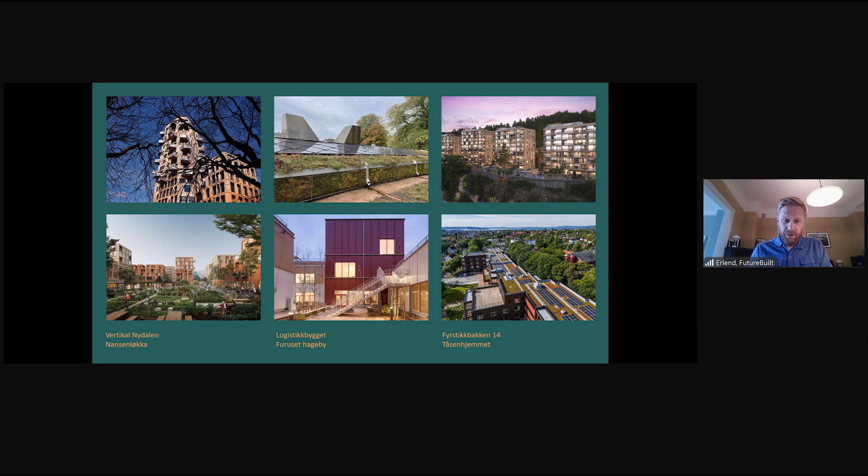We do big and small, and not to mention high tech and low tech, because we think it's very important to show green solutions for all of those buildings. And then we emphasize that innovation needs to be a part of every project, so that we break new ground, so to speak, every time we build something. And the intention is to sort of inspire or educate the rest of the building sector, and therefore we do have a lot of seminars. We invite for visits on construction sites. We do courses digitally and physically, and a lot of workshops where we dig into specific topics.

And everything we do is freely and openly available. That is very important for us. Most is in Norwegian though, so I don't know if you could make much use of it, unfortunately. So we work in 9 different municipalities in Norway, and we cover the 4 major cities in Norway, plus the surrounding municipalities in some of those metropolitan areas. And unfortunately, we are not able to work outside these municipalities at the moment, but we're hoping to expand eventually.

But today I'm asked to speak about circular construction. So if you will allow me, I'll start with a backdrop. This is the Norwegian map that you see, and this happens all over the world. Nature is eaten out piece by piece, and at a scary pace. So we lose a lot of areas each and every day and every hour, and Norway is no exception. So the construction sector is, of course, partly to blame for this, partly due to what we actually build. But today I will focus on the building materials that we build from.

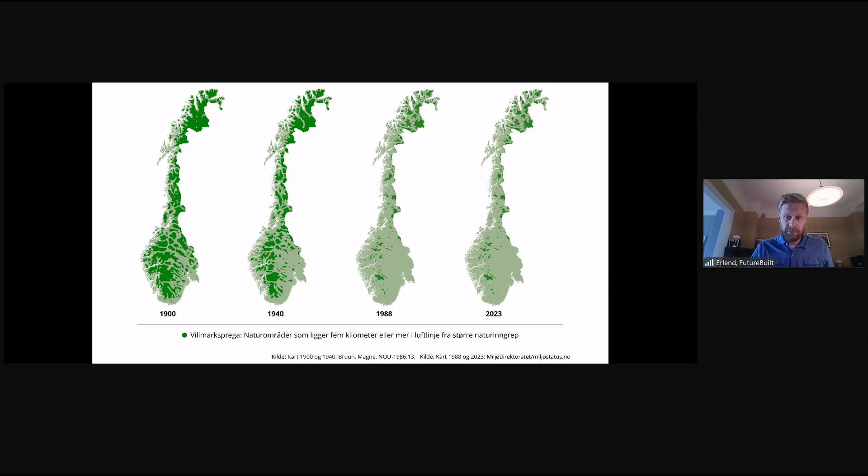And guess what? The building materials are extracted from nature in Norway or elsewhere. We are even starting to run out of many of the most used materials within construction, such as gravel, sand, and clean water. It's therefore of great importance to keep the materials in the loop in buildings as long as possible. We also have an enormous waste problem. So in Norway, the building sector produces about 1/3 of the national waste, and much of that waste is building components that would be perfectly usable in buildings.

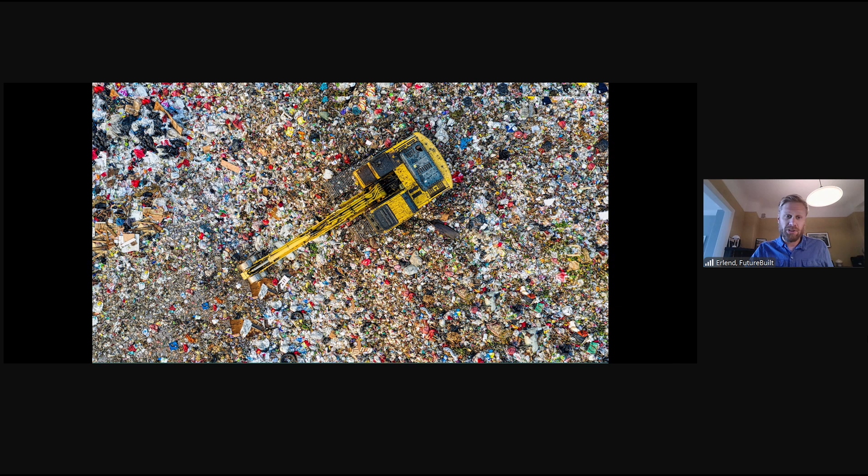So we ought to find new ways to work in order to prevent this. But of course, we should also find ways to extract new products from the waste so that we no longer just burn or deposit the waste like we've done in the past. And the third big reason for me is the climate changes that are already happening. By reusing building materials, we save a lot of CO2, often more than 90% compared to using virgin materials.

And the other good news is that reuse also gives an instant effect on climate. And as you know, we have little time to lose. So it's about time now that we really get reuse going and scale it up. So what I'm trying to say in total is that there are many good reasons for doing reuse and circular buildings. It's not only about one of these important ecological topics.

I just wanted to show you this graph that we made for climate reduction in our buildings. This is a model that we've made in FutureBuilt called FutureBuilt Zero, and it shows the quite dramatic transition that the building sector is going through if we are to meet the obligations of the Paris Agreement. So that is the orange line that you see on the top, showing the reduction down to 90 to 95% in 2050. And we're not even close to move toward that line in Norway today.

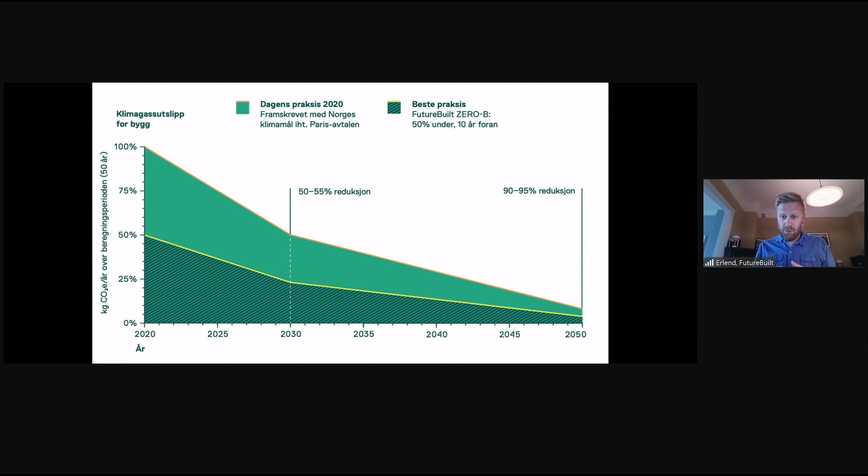And therefore, it's challenging for the developers that we work with, that the FutureBuilt pilots should lie below the yellow line. That means that they should be twice as good as the general building sector, and they should lie 10 years ahead. So that is our intention, to find and test out the solutions that can be useful for the rest of the building sector in the coming years.

I'm sure you're familiar with it, but I just wanted to explain so that we agree on the terms. When I say reuse, I mean that we're taking out a component, using it more or less as it is. So you could use a door as a door, for instance, but you could also do what we call upcycling and, for instance, turn the door into a shelf. That would also count as reuse in my book. Whereas recycle is when you grind up the door and make something completely different, like wood chipboard, for instance. So that is not as efficient.

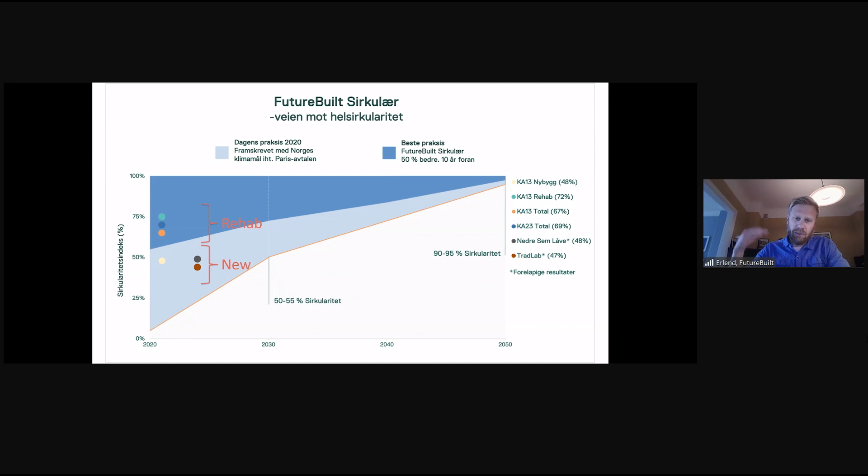So a bit inspired by the FutureBuilt Zero graph that I showed you, we have developed this sort of opposite tool. It's called FutureBuilt Circular, and that is a roadmap that leads us to almost 100% circularity in 2050, which is very important. So what we see in the first projects is those dots on your left. We see that the rehab and the transformation projects are performing very well, whereas the new buildings are not as sophisticated yet. And that is probably much because this is a very new way to work. So we're not that advanced at new buildings of old materials yet, but we are really working on it. So I think we could start to do our new buildings also in the dark blue part of the scheme within a short time.

So this is just the dashboard of the circularity calculator that we have developed. That is, as you can see, also available in English, so you could test out your own projects if you would like to. So we divide here into present measures and future measures, where the present is the most important, as the future is very unpredictable, and we don't really know if we will have an environmental effect of reusing materials in the future. So therefore we say that preserving buildings and reuse of materials is the most important.

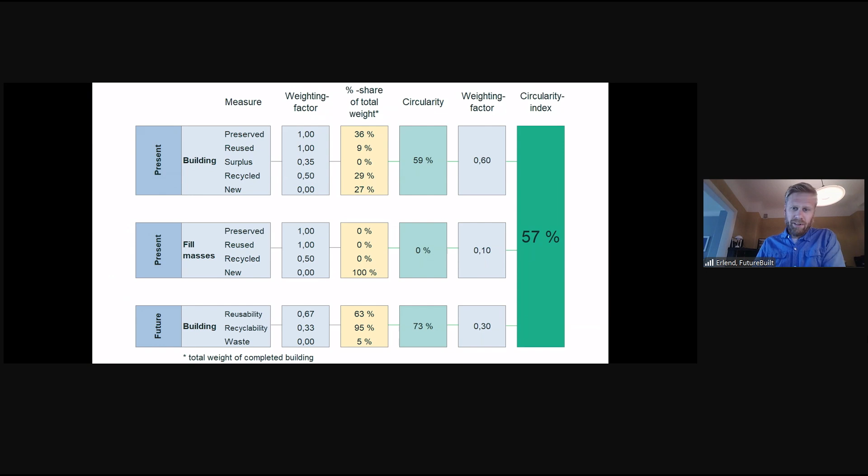But then of course you also get some points, so to speak, for using surplus materials from the industry, or you could use recycled materials, which is also very important. And all in all, this sums up and it's weighted, and the number you see on the dark green bar would be your circularity index for your project. And that number should, of course, be higher and higher for every year as we go along.

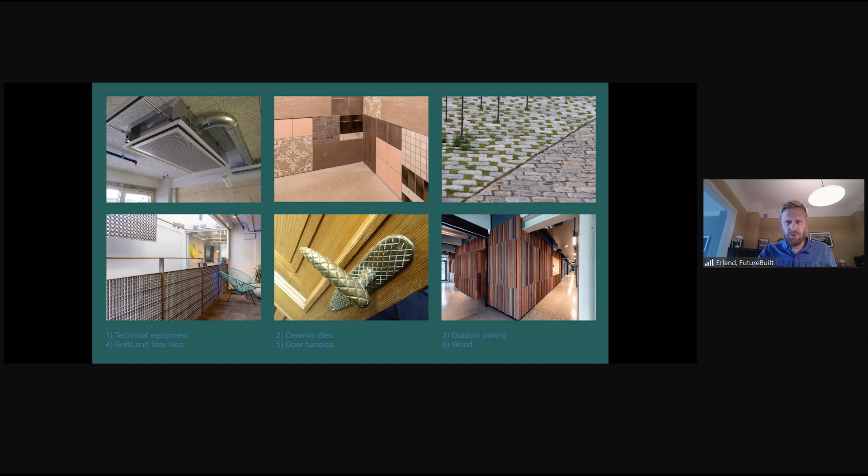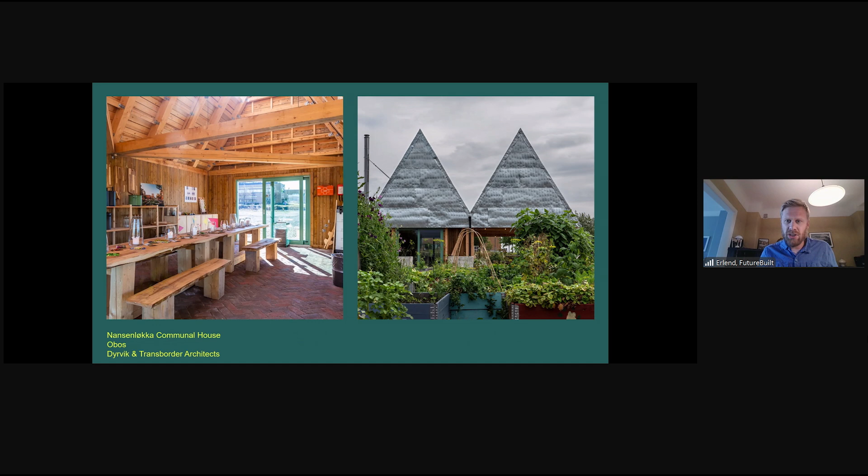And so I mean, it's very easy to find ways to reuse materials, but I think we as architects need to be a little creative on finding new ways to use the old materials and to make nice architecture out of it. So in this case, we, for instance, made this pavilion with old ventilation ducts that we used for roofing. And in this case, we used roof pans as facade for another small pavilion.

And usually we don't do projects of this small scale, but I think it's fun, and it's a great opportunity to test out new solutions, as the risk is very low compared to larger scales. And in this case, we only bought screws and nails. Everything else was

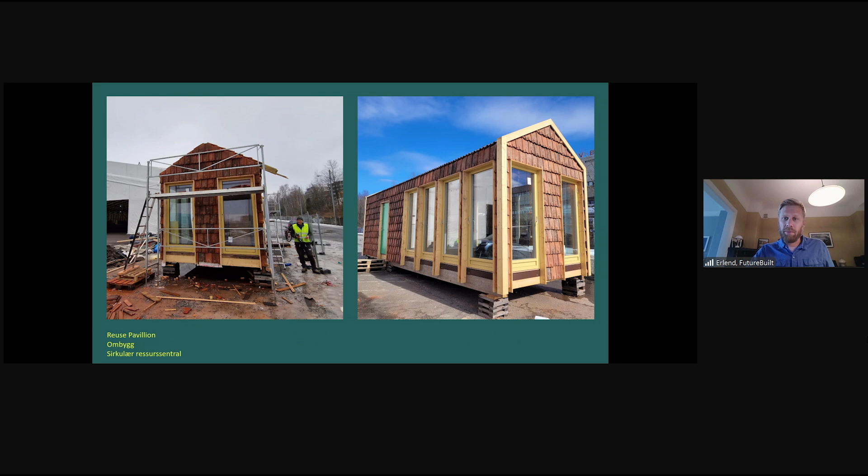taken from existing buildings. And then we have this old barn that was to be replaced with a modern replica due to preservation issues. So instead of demolition, we disassembled the building as carefully as we could. It was a bit dangerous, so actually the part in the most poor condition was more or less demolished. But we managed to get a lot of timber out of it, and we could build the new replica using a lot of old materials from the barn.

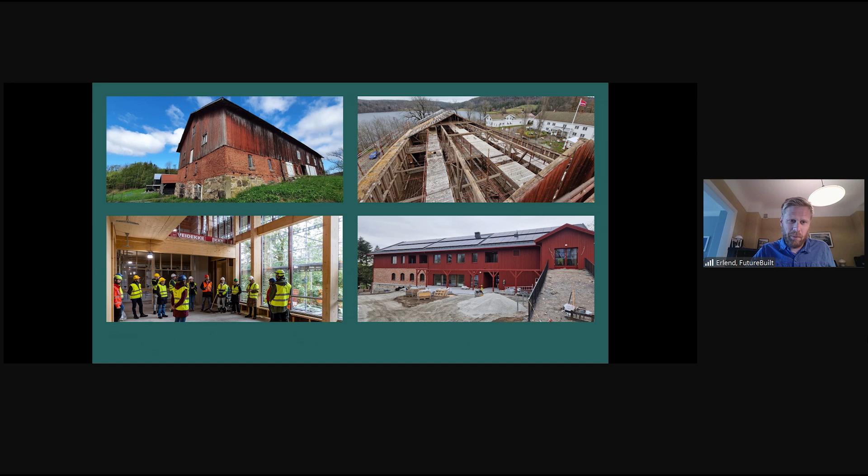So we had construction wood, we had the bricks and natural stones, for instance. And we also harvested materials from other buildings that we made this new barn from. And eventually we had a lot of surplus wood when we were finished building, and then we donated the materials to another pilot that we're working with. It's this project that we are doing in an outdoor museum in Oslo.

So now you can see that the traditional timber frame construction is coming up with the old timber that was used in the barn. And for the shortest wood members, we ended up with quite small bits, and then we used them for a cordwood wall for the outer walls.

So here we just dig up clay from the construction pit as we build, and we use that to mason up the cordwood with. So that is very efficient use of the local resources, of course, but it's also almost a zero waste construction, because you could use tiny bits of wood into a wall. And it's a traditional outer wall that actually performs pretty well in terms of building physics. So I think that's also an interesting thing about it.

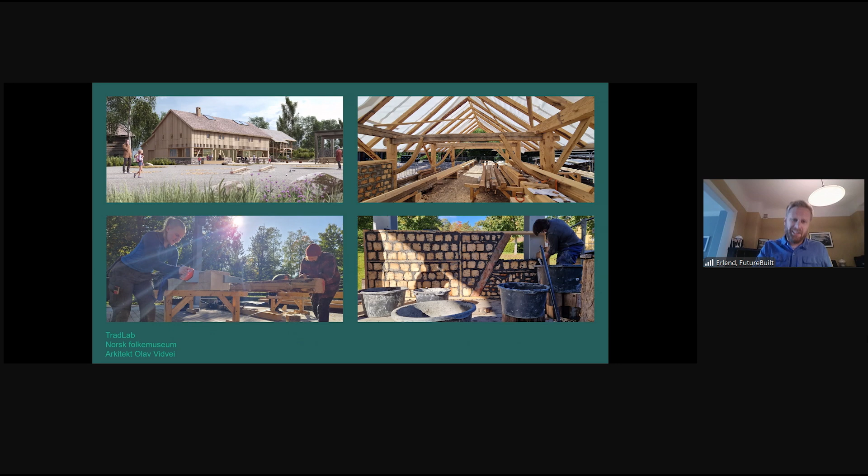So besides being a professional workshop for the museum, this building will be used to teach craft techniques to kids and to artisans. So we try to showcase the circular principles that we see in vernacular architecture, because this knowledge, it's not new, it's just been lost for a couple of decades. But if you look at buildings like this, they knew it all back in the days. So they had well-known materials, they had local materials, non-toxic materials, and all the members are easily replaceable and detachable. So we need to find back to that traditional knowledge.

When it comes to reduce global warming, we must look into the heavy materials, and that is where we see a lot of the carbon is embodied. So for instance, brick is a very interesting material, also architecturally, because it's a material that really ages with style. So it's often much more beautiful the second or third time you use it. But then, of course, you need to know how to do it and to use soft mortars so that it's easy to take the bricks apart, so that we don't sort of pull out the ladder after us and crack the bricks the next time we want to use them.

And we've also worked a lot with the steel and concrete construction. And the steel has proven to be not very, but at least quite easy to work with for reuse, whereas concrete has been a puzzle.

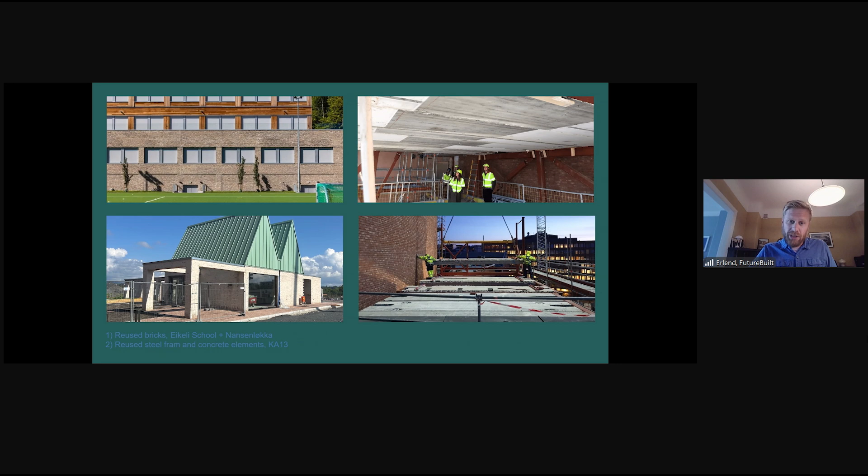And we are still working on it, but we have developed a national standard now for reusing hollow core slabs in building. So that is very important, and it's a very good start. But of course, we need to make it as cheap and as attractive as using virgin elements. And we're almost there after a couple of years now. And if we're able to scale up this, we could really save a lot of greenhouse gases from the building sector.

And those of you that came to Oslo will probably recognize this place. It's called Circular Resource Central. And that has been a really important facility for us in Oslo. So now we have 5,000 square meters inside this tent and 5,000 square meters outside that we use for intermediate storage and warehouse for reused materials.

Infrastructure like this is crucial to scale up reuse and to establish well-functioning marketplaces. So we are still in a sort of trial phase, but I think already after 1.5 years, it's quite a success, and we're hoping to spread this out to other cities as well, so that they could have their local markets.

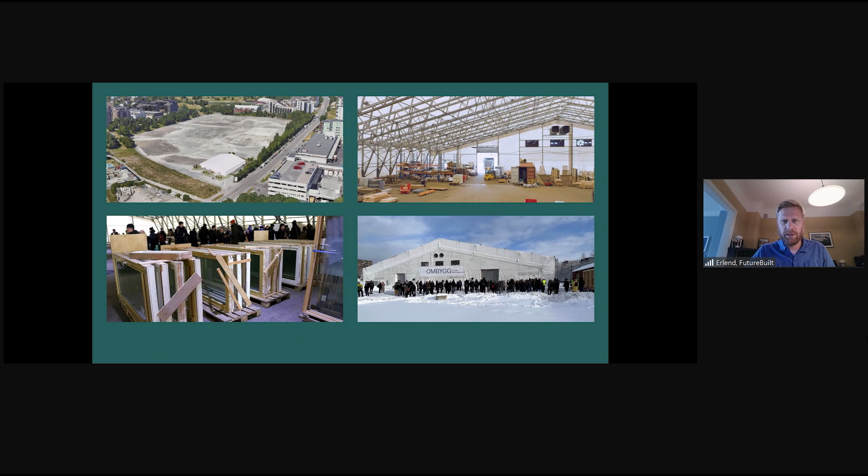And I could also mention that we managed to do the entire construction while the building was inhabited by the residents. So that was an interesting case. But since we were working mostly on the outside, that was possible.

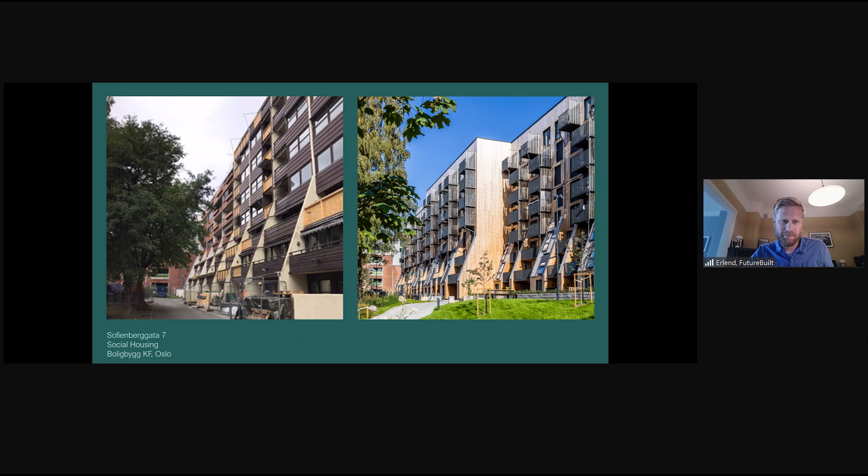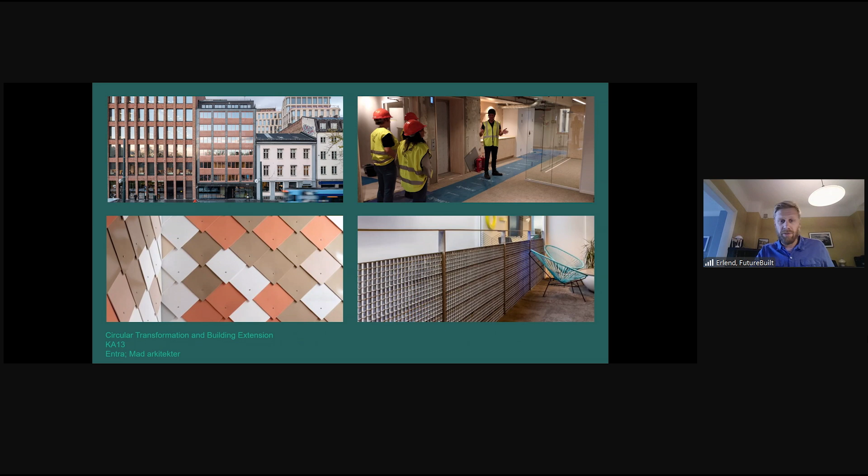So this is the first circular building that we made in Norway. That was in 2020, and that gave us a good chance to experiment with all kinds of reuse in a sort of medium-size building. So here we harvested materials from 25 different buildings in the Oslo area. And the project is both a retrofit of a 1950s office building, but it's also an extension using reused materials. All in all, we saved 70% CO2 from the material side of the building due to the reuse strategies.

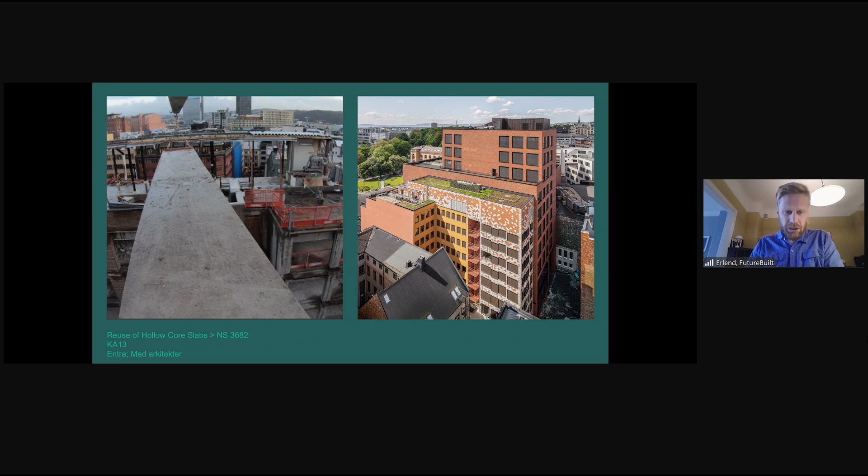So here you see the hollow core slabs are coming into place. So the plot was so narrow, so we had to borrow a crane from the neighbors in nighttime in order to get this done. But now it's also our office in FutureBuilt. So we're taking a lot of pride in that building as a sort of a Norwegian pioneer on its field.

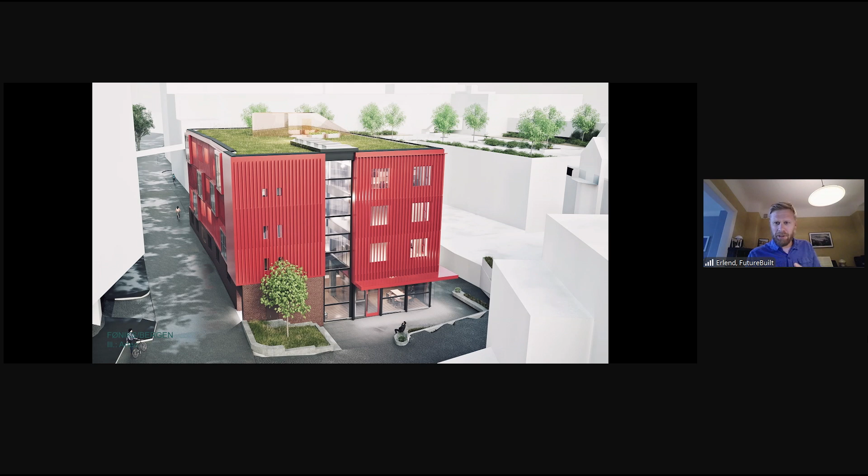And I also wanted to show you this project we are working on currently in Bergen. It's also based on 2 existing buildings that are built together in the project, and here they aim for a reuse of 100%. So that means that they're not supposed to buy anything new. They say now that they have collected around 90% of what they need for the building phase. The last meeting I had with them, they asked about good solutions for reuse of screws and glue. So they're really into the pudding now and taking this seriously.

And of course, it's not the most important thing in the world to reuse your screws and the glues, but it's still very interesting to push the limits and to find new ways to overcome this very linear economy that we're used to.

So we also have a project in Drammen, that is a city 30 minutes west of Oslo. We are very happy there not to work merely with a singular building, but with an entire block. That means that we're able to harvest components from various buildings and utilize the resources more efficiently than we could in a building.

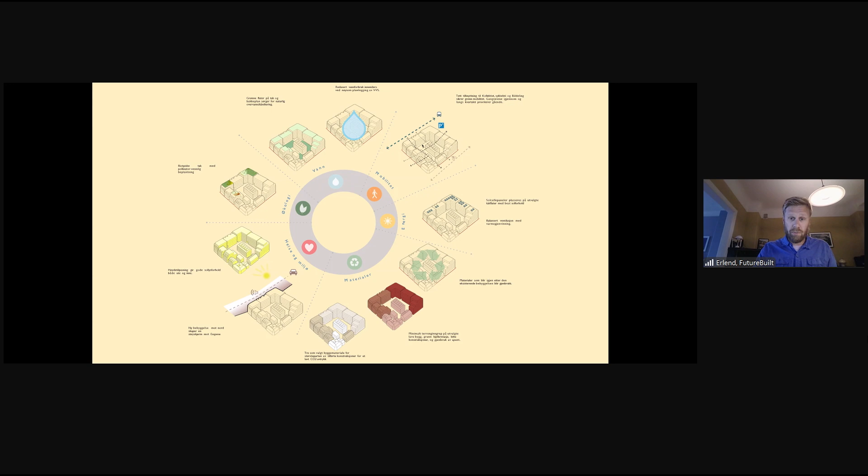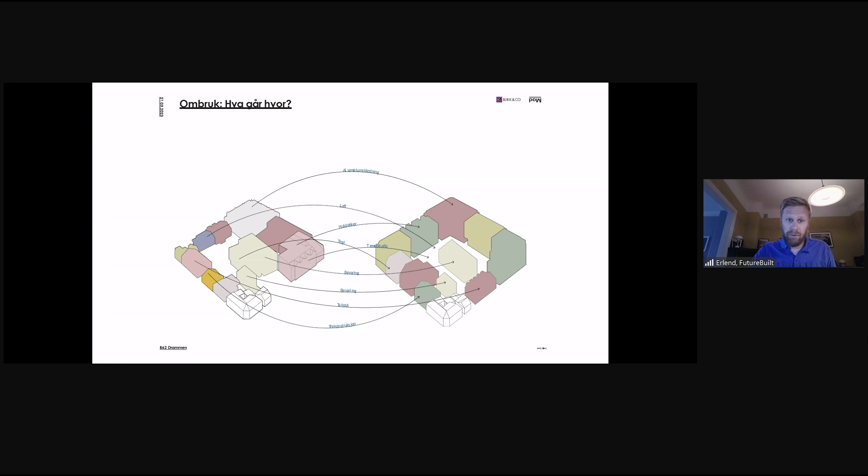And of course, this is not only about the building materials, it's also very important for other sustainability topics such as mobility, energy, health, biodiversity, and not to mention water treatment and ecology. So in this case, some of the old buildings are preserved, some are transformed, and some are dismantled. And through a careful mapping, we are hoping now to be able to use the materials within the block for transformation, but also for new structures.

So at least we will manage to reuse the hollow core slabs, the concrete slabs. I'm sorry about the Norwegian slide. We could use the bricks and aluminum sheets for facades. We have a lot of timber construction. And then from there comes all the different parts with the smaller bits and pieces that are taken out of the buildings. But we're trying to make use of it all.

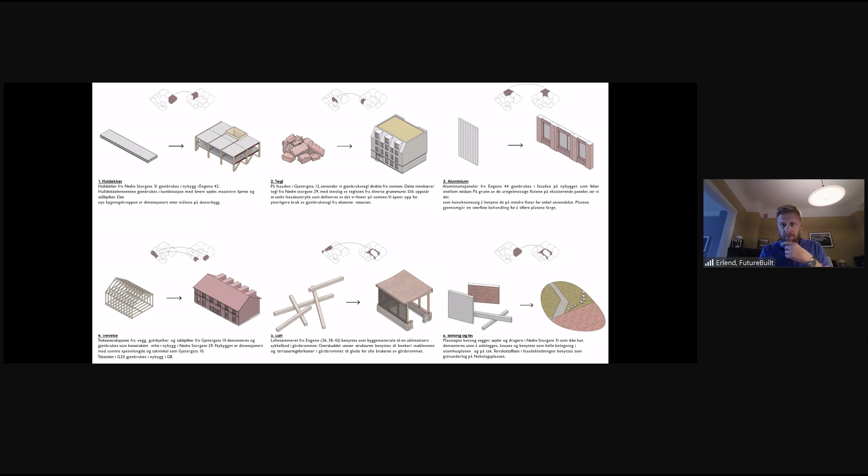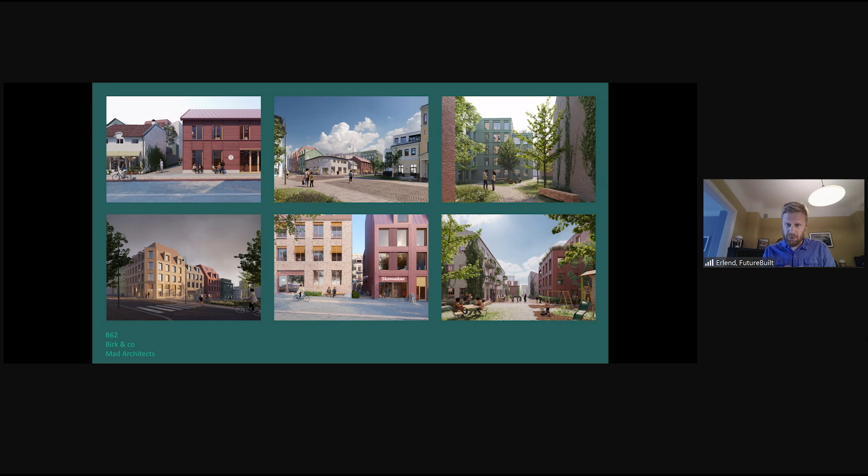And this is how we wish that the block eventually may look. As you can see, we try to maintain the rhythm and the scale of a small town block, adding new qualities in between, so to speak. And please note that there are no car parks in the area.

So now we try to find more reused materials that we could use. The market in Drammen is not mature yet, so perhaps we need to go to Oslo and buy the materials from there. We'll see. But we also hope that this could be a vehicle to build up a reuse facility in Drammen as well. So we hope that within some years, all cities with respect for themselves should have their own reuse facility.

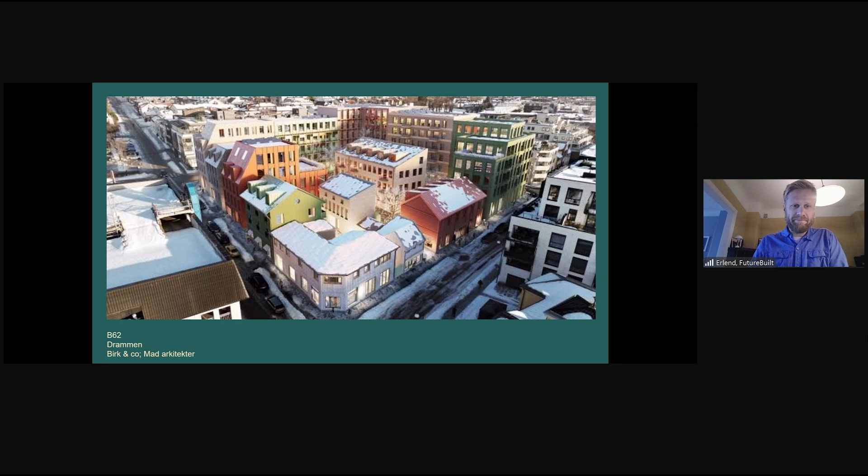So we're speaking here about 40,000 cubic meters worth of concrete. So you do the math. And in order to illustrate this, I usually say that just driving out the demolition waste from this structure, and that's the load-bearing structure alone, it would require 3,000 lorries through the city center. So it was really important for us to convince the client to save the structure instead of demolition.

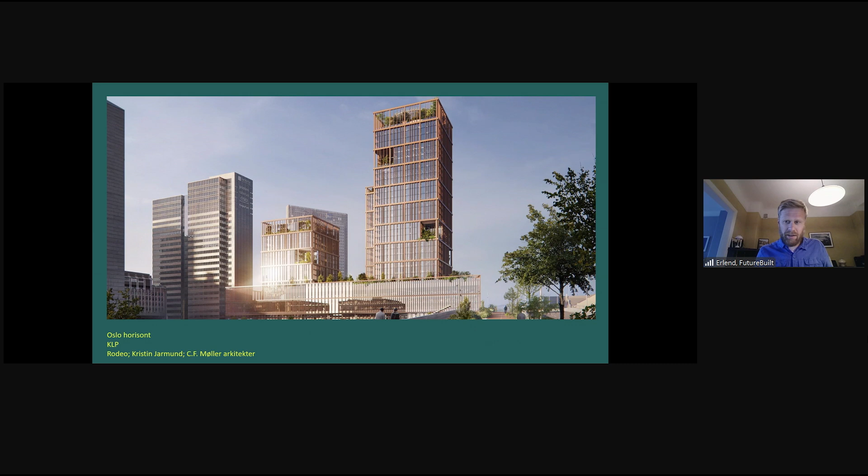So we will also develop the roof into a 5,000 square meter garden. So I hope the next time you come to Oslo, you could come and wait for your train on this roof with a nature imitation. We'll see.

So I hope, in a couple of years, of course, that you could come and wait for your train here in central Oslo.